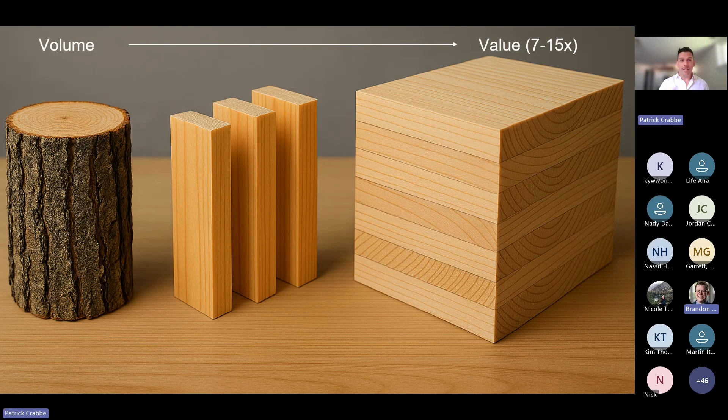So if we take this dimension lumber and we arrange it in a different way to create a mass timber product, which is demonstrated here by a cross-laminated timber panel, which is a long spanning solution for exterior walls, mainly floor and ceiling or interior wall systems. And essentially that's all it is, just dimension lumber, cross-oriented and pressed together to create very high-performing, lightweight solutions.

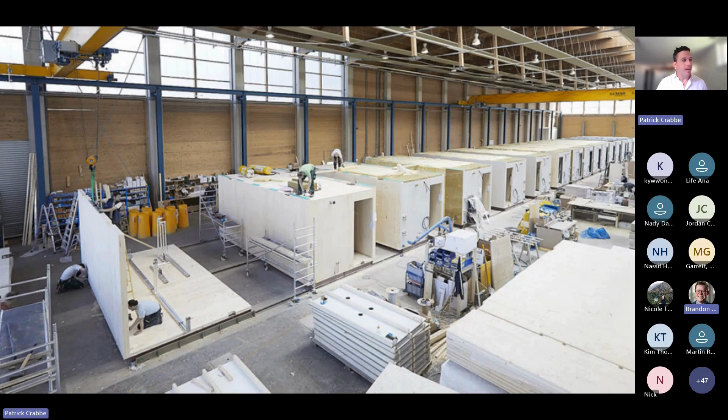And these are prefabricated solutions that can also be modular, as shown in this image. So it really does supply the trend for faster, more accurate construction that really does counteract a lot of the trade constraints that exist in today's market.

Now, the other piece of the mass timber family is glue laminated timber. So I just talked about cross-laminated timber. Now this is glue laminated timber. And what's different about this is more your columns and beams, not your large panels. And again, it's dimension lumber that is just running in one direction that's pressed together.

Yes, it does have to be of higher quality, but again, that just reinforces the value chain of forestry to manage our trees so that you're investing in them so they grow straighter, they are stronger, they have more space to grow, and you're ultimately getting that 7 to 15 times value out of that same piece of wood.

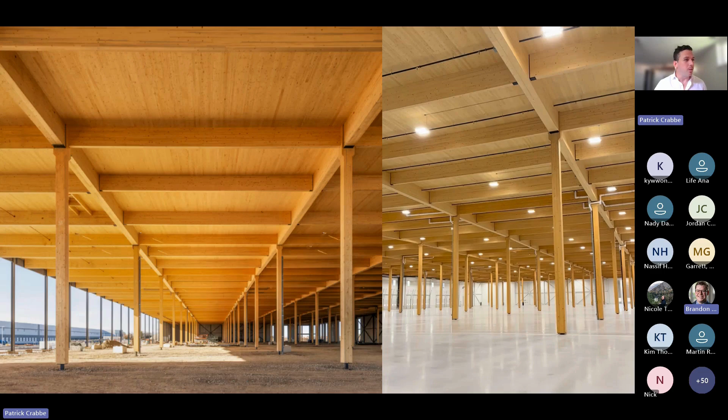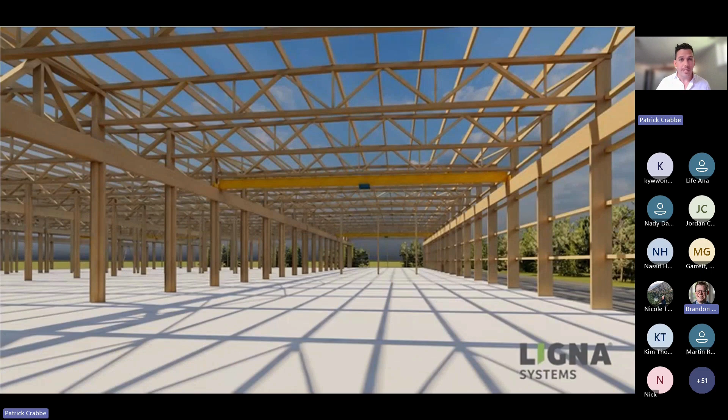And really, these glulam beams are the main structural system for a lot of industrial uses, residential or office. This is the Prologis warehouse in Brampton, Ontario that was just completed, 260,000 square feet. This is our mass timber company facility that Brandon mentioned at the start of the presentation. I'm going to talk about that in a little bit, but we're around a 200,000 square foot warehouse with massive cranes, and we can cost effectively do this in a glulam and CLT structural solution.

And the glue laminated timber doesn't just stop there with kind of your meat and potatoes post and beam construction. This is a Fast + Epp project, the Richmond Olympic Speed Skating Oval. If you've ever been there, it's an amazing building. It has around a 100-meter span with hybrid glulam elements. So really what mass timber provides is a low carbon infrastructure solution that can work in combination with or in direct substitution of steel and concrete or conventional materials.

And the reason for that is because in the East, we've always thought that our lumber doesn't have the right strength characteristics. And that's what I've heard through my entire professional career that has been developing the mass timber market in Canada from day one, all the way to trying to realize manufacturing opportunities here in Nova Scotia.

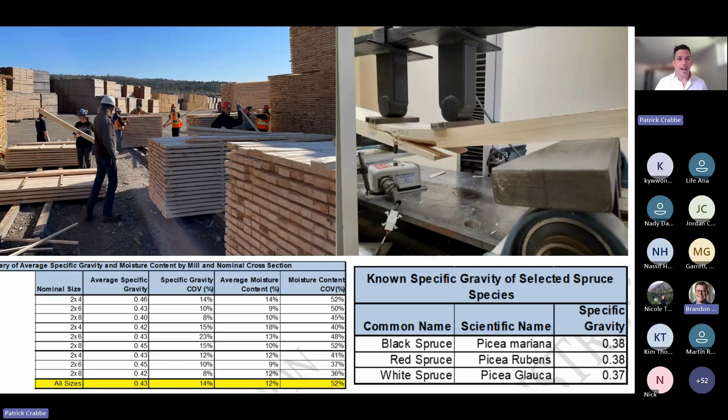So I just said, enough is enough. I think that we need to really test our lumber to see if the published strength values actually are correct and whether mass timber manufacturing is really not that feasible in Atlantic Canada or Eastern Canada compared to the West Coast. So that's exactly what we did. And this really was the genesis of the Mass Timber Company.

And to clarify, yes, I am the director of mass timber at Bird Construction. And in order for us to competitively supply mass timber and grow the market, we need to have more supply options. We need to increase our capacity.

So Bird is not part of the Mass Timber Company, but Bird has been very supportive in realizing the need to grow the mass timber market. So from the side of my desk, leveraging many government partners and two sawmill investors, Elmsdale Lumber and Ledwidge Lumber, we handled over 1.2 million pieces of Nova Scotia spruce and destructively tested almost every piece to truly understand the density or specific gravity value, which translates into strength of fiber.

And as you can see, the published values on average were around 0.38. But in reality, they're around 0.43 or higher. This is just an average with lower quality mixed with higher quality. So what that shows is that we're around a 20 to 25% discount of the published strength rates versus the actual strength of the fiber. So that was an incredible finding, and it really does unlock the opportunity for regional mass timber manufacturing across Canada.

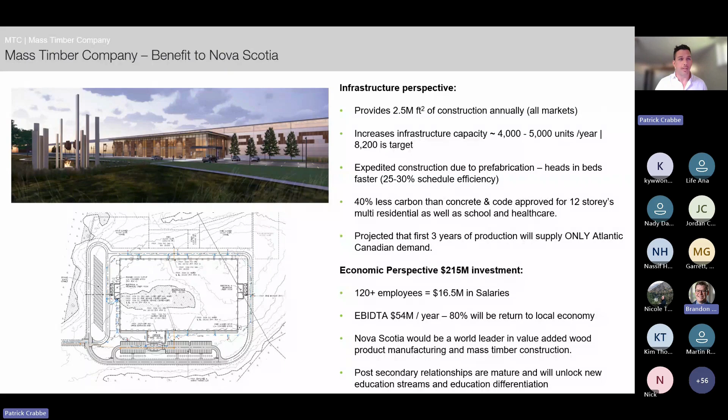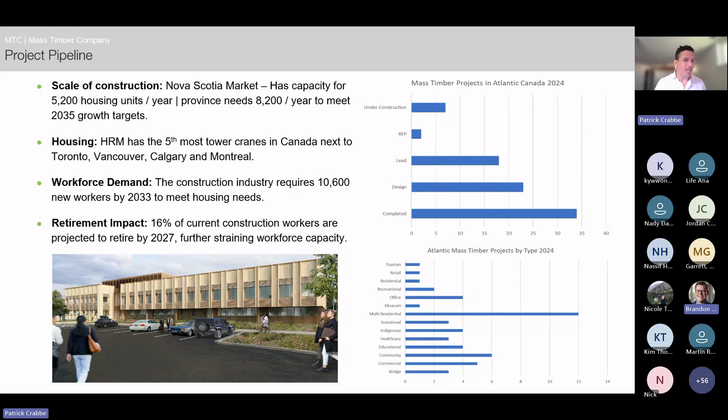From an economic perspective, it's around 120 to 150 employees, very high paying jobs. And it really does create and strengthen the ecosystem here from a forestry perspective, where we will position Nova Scotia to be one of the forestry leaders in Canada. So again, as a regional solution, as we're talking about trade wars happening now, being reliant on export markets to feed our forest industry, and having challenges importing necessary building products from the US, this truly is a market-ready solution that has massive demand and will meet where we're going in this region with a shrinking trade pool of workers.

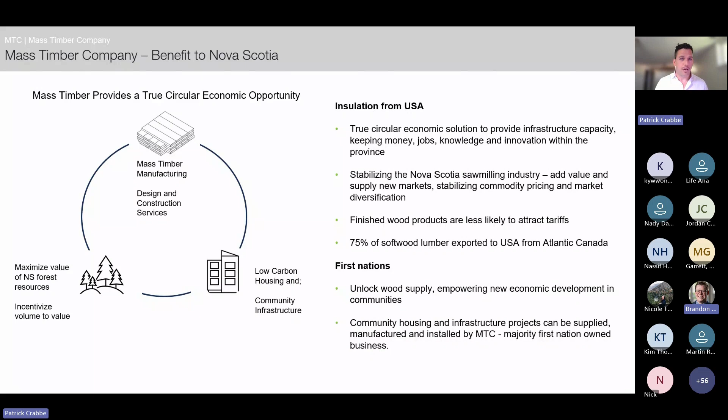So what mass timber provides, from an insulation perspective from the USA, is a true circular economic solution. We grow the trees all the way through, converting them to a building product and using it in public and private infrastructure, from houses to hospitals. It stabilizes the forest industry, it's going to help unlock a lot of wood supply, and it incorporates the opportunity for First Nations to be involved. As it stands now, we are positioning the Mass Timber Company to be majority owned by a coalition of Mi'kmaq First Nations in Nova Scotia, which is really groundbreaking unto itself.

What a lot of cities and municipalities are also looking at is, if there is regional mass timber manufacturing, how are we going to help support this use? And how do we address getting heads and beds faster? We all know through prefabricated or modular solutions, that is the key benefit. You can build faster to satisfy the housing demands. So here in the Halifax Regional Municipality, mirroring what's been done in Toronto and Vancouver, we're evaluating bonus densities for mass timber solutions. Step backs may be relaxed and heights may increase for what will be permitted in downtown cores.

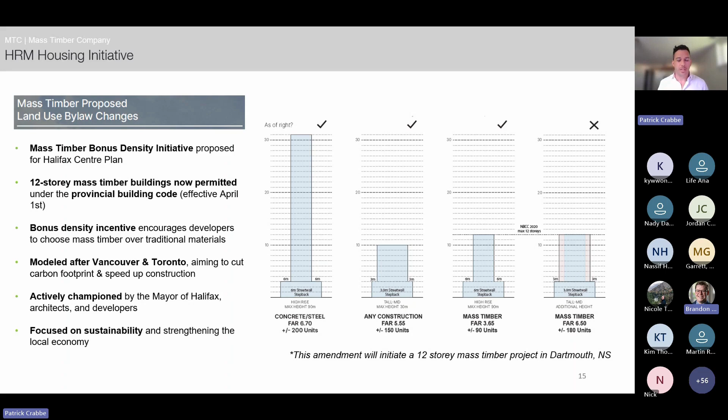So we are talking about 12 stories of mass timber being permitted within the Halifax Centre Plan when it only has to abide by a mid-rise step back of 3 meters. What that means is you'll get about 20 to 40% more density, and you'll be able to build these housing units much faster. So this would be an incredible breakthrough.

Just a quick business case for tall wood construction. Do I think tall wood is really where the market is for mass timber? No. It really is in the missing middle. Anywhere from above 6 stories to 12 stories, I think, is the sweet spot for mass timber from a residential perspective. But this is a very good case that had some excellent findings that I'd like to share.

So yes, it looks like there is a bit of a premium when you're looking at the cost of formwork versus mass timber, and maybe some of the unique engineering challenges that would need to be required to support a lighter mass timber structure of this scale.

So you're looking at about $1 million premium in materials, but then that is offset through the speed of construction. And as we all know, formwork costs are only going up. Form workers are in very high demand, and they're often dictating the schedule for developers. So this is, I would say, a very conservative solution kind of based on a project of this scale.

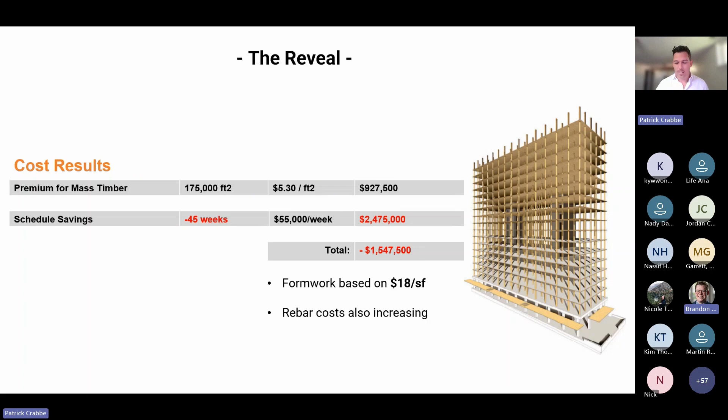Now, to truly realize the schedule efficiencies associated with prefab solutions like mass timber...

Oh, Brandon, is there an issue with people viewing the presentation? No, keep going. I was okay. Just keep going. Yep. Great.

Is that you really do have to have a collaborative contracting model. And this is not really the most exciting thing to be talking about, but it is the most important thing to realize the benefits of offsite solutions. And what I like to say is that the new affordability is truly cost and schedule certainty.

From pre-COVID to post-COVID times, a lot of the contract models that we're using, like hard bid, that worked in the past are really not working today, at the cost of taxpayers and at the cost of commissioning buildings to get people in them sooner.

So in these traditional hard bid models, you really have an owner that's working with a team without a lot of input from the constructability side or market-based trade feedback for costing, or sequencing and logistics associated with supply chain. These are beautifully designed buildings, but when they go out to the market, you're really getting mixed results on what you're going to get back.

And what happens is it creates a very frictional relationship between the designers and the contractors that are bidding these projects, because they're often coming back much higher than what the quantity surveyor had dictated. And then everyone just points to the market and says this is because of market conditions. And there's really no accountability associated with the project.

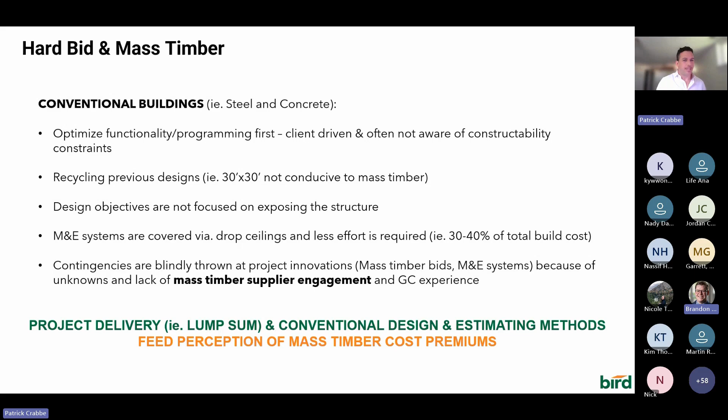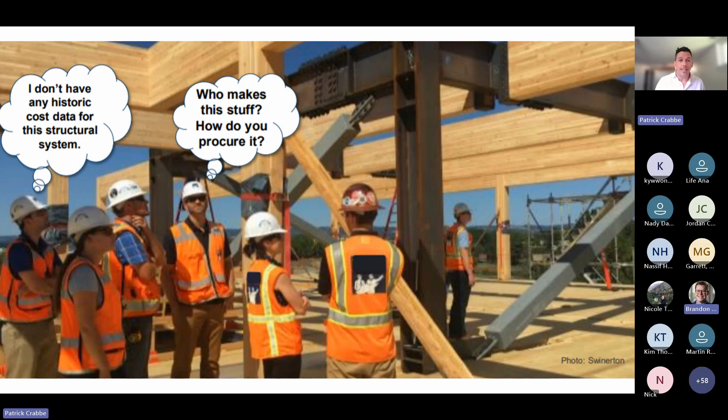So what happens is, if you don't have a lot of experience and you're receiving this package to bid, contractors and the individuals bidding the project are just throwing blind contingencies at it. So ultimately, that's the narrative and why that premium, I would say negative perception, exists.

So why collaborative contracting is so critical is because, yes, these are prefabricated solutions, like I had said, so there's an increased design effort. And often it does require modeling to various levels of detail to do clash detection, to figure out the problems before they happen on site. And so it is pre-construction resource heavy.

And you do sometimes have to engage the authority having jurisdiction just based on false fire perceptions. So there is just a little bit more thought and effort that's required up front. And this is a really interesting graph that shows again why mass timber is somewhat different depending on the region where it's being supplied and constructed.

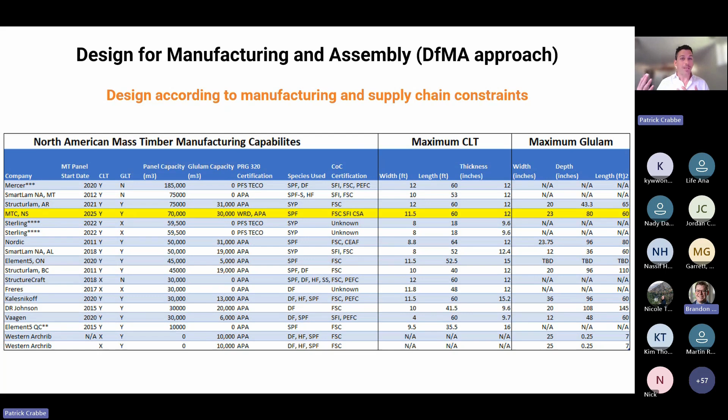And this just goes to show that not all manufacturers are equal. Some have the ability to produce large scale columns and beams, some don't. Some have the ability to produce glue laminated timber, and some can just produce cross laminated timber. So you really have to understand the supply chain for mass timber to really optimize your design, and that requires collaboration.

So this is a great example of a large project. It was a public client, and they had spent a lot of time in the design without having a construction manager on board or necessarily engaging the mass timber industry for feasibility and optimization of design. As you can see, the columns here are very large, and a lot of the columns of this size would have to be manually glued together. So finding solutions to minimize column sizing and beam depth are really critical to the feasibility of mass timber.

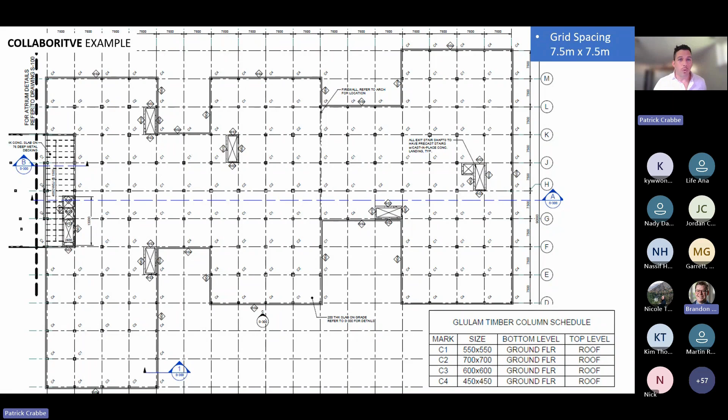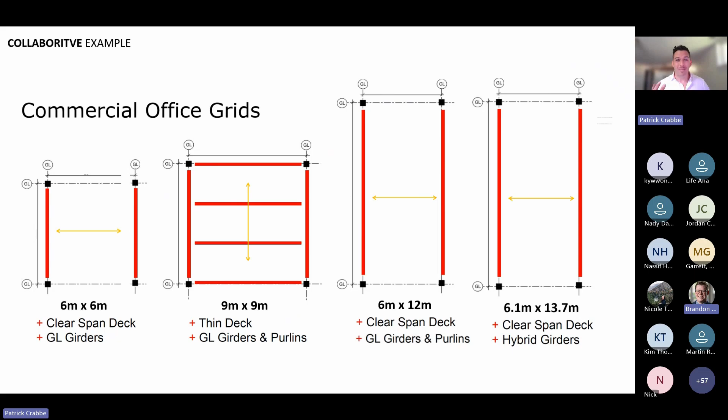So when Bird was awarded this project and we looked at the design that had a lot of money spent on it, it was really just a matter of minutes to realize that, wow, if we change the grid slightly, we can reduce the wood volume in this project probably by 50% and save the client millions of dollars while maintaining the same spaces for programmability. And there are very good grids for office buildings that are slightly different than what would be provided through conventional materials, like I had mentioned, recycling designs that really do provide high performing solutions.

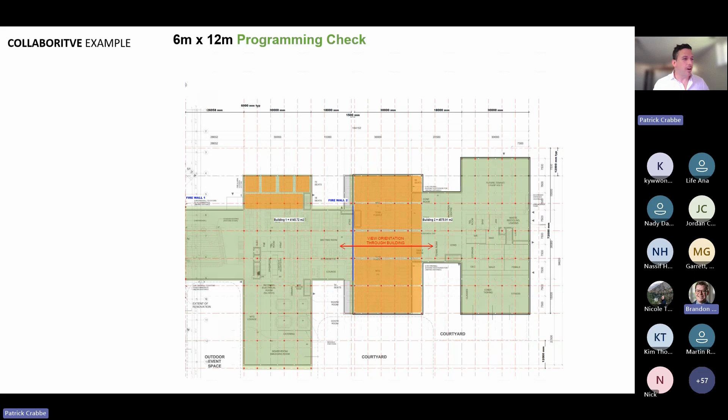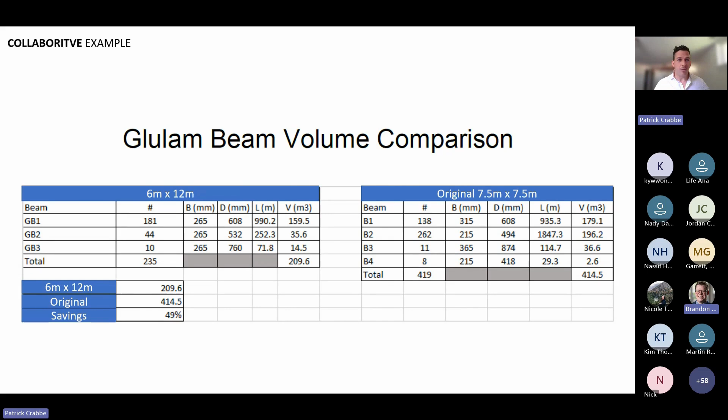If you are planning a mass timber project, engage the mass timber industry. And if you have a construction manager, really lean on them to work out what is the best solution. So I have also developed an early onboard procurement system, whether your project is hard bid or construction management, whether it's getting public money or private money, and it doesn't cost a lot whatsoever to implement. And I have a full presentation on this that I'm happy to share at the end. And really, all the reasons for engaging the mass timber industry early in your design are here. I'm not going to repeat them.

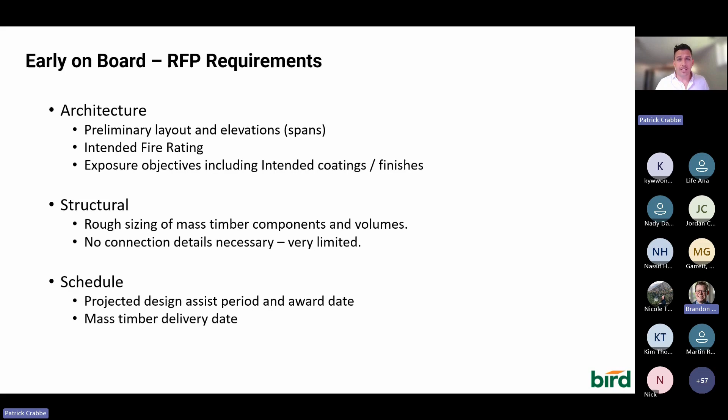All the client has to have is a conceptual drawing, understand a little bit about the layouts. You just need rough member sizing from a structural perspective, no connection detailing, and just what is your schedule expectation. And that can go to the market. And I've developed this evaluation matrix so that you can evaluate all of the feedback from the mass timber suppliers to see which one you want to go with early in a design assist manner.

And let's say the client only has $10,000 to do this early onboarding, then that's all you have. And the mass timber companies will tailor their proposal to provide the necessary feedback to you within that pocket of money. And if you feel that you didn't get the right amount of service based on the design assist, there's an off ramp to then go back out to market. So you're not tied to the individual early in the process. So again, this just brings a competitive element when there's limited information to help you early in your design so you're not wasting time and burning design dollars.

Okay, now this is kind of the conclusion of the presentation. I know I've been all over the map here, but this is kind of the carbon benefit. And this study is very close to being public, and I will make sure that Brandon gets a copy of it and he can share it with all of the meeting participants. As I had mentioned at the start of the presentation, this was in partnership with the Mass Timber Institute at the University of Toronto, Ha/f Climate Design, Kelly Alvarez Doran, Entuitive, Emily King was really the driver behind that, and Bird assisted from kind of the costing and construction narrative.

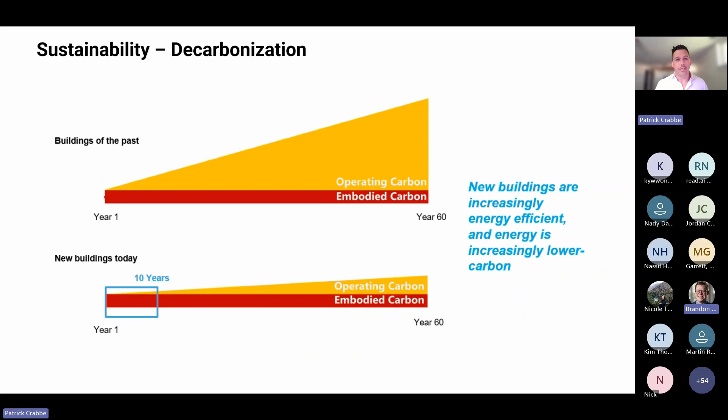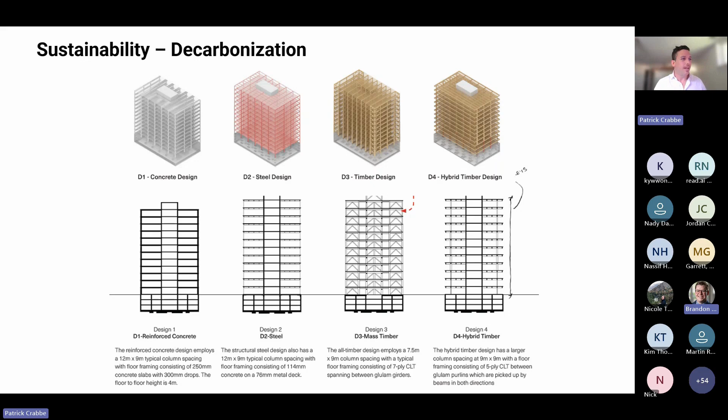So I hope that definition of embodied carbon was clear. But again, this was the summary of this study. We had a concrete design, a steel design, a timber design, and then a hybrid timber design. These were 12-story buildings positioned in Calgary, Vancouver, and Toronto. And as you can see here, the cost dollars to implement a timber solution are very, very comparable to that of concrete. So it's quite exciting.

And this graph down here really does show that global warming potential. Whereas if you're building a 12-story office building in Toronto, you're around 5,500 tons of CO2 equivalent, and you're around 2,500 of that for mass timber. So it's pretty much a 50% carbon savings. So for every 2 buildings you build, you get 1 building free from a carbon perspective, which really does help jurisdictions and provinces tangibly meet their carbon mitigation objectives through public infrastructure.

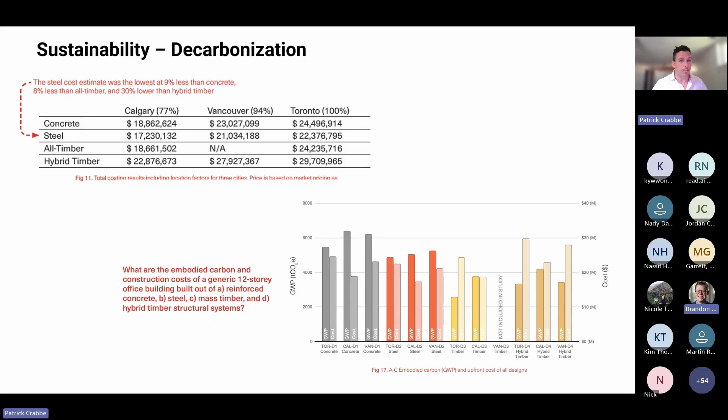Now, what is also very interesting is that wood is a carbon storage mechanism, and this is currently not realized in any life cycle assessments or any building codes or regulations. But half of wood's mass is carbon. We all know from high school biology the photosynthetic process of taking water and CO2 and elements from the soil and sunlight. You're creating complex carbon chains in the form of sugars that are stored in the tree as food, and that is the root of the carbon sequestration.

So when you're factoring that in as a carbon bank, when you're specifying mass timber, not only is it a lower embodied carbon to produce the product and put it into your building, but it's actually acting as a carbon bank throughout the life cycle of that building. So it's almost like an RRSP fund for your carbon mitigation objectives.

And really what that means when you realize the biogenic carbon store is that these can be carbon negative buildings, which is incredible because one of the greatest conundrums of today is having economic growth and population growth and needing infrastructure. It's all coming at the detriment to our environment. And this does provide a strong regional and circular economic solution that's very high performing. So it's exciting. It's very exciting.

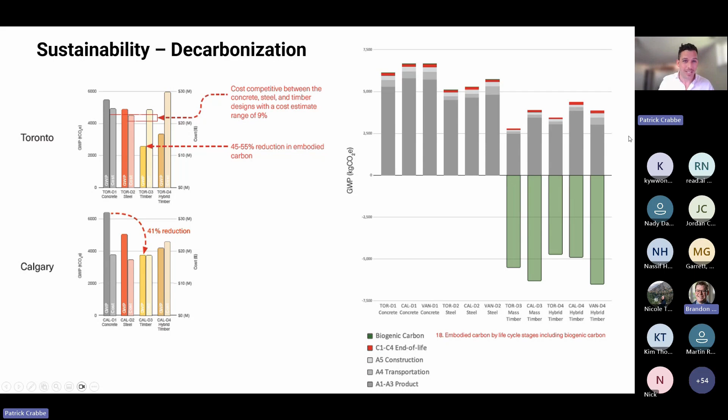So I have to talk a bit about Bird here, and we are one of the only general contractors in North America that has a dedicated center of excellence to mass timber. We have 15 projects under construction across the country now, of all various uses. And within our center of excellence, we collect all of the data to make sure that we've got continuous improvement and education for all our operational and estimating teams. So we're very passionate about this and really want our clients to have a strong solution relative to mass timber.

And these are just the main bullet points of what we focus on. And I would encourage all designers or contractors to implement this same roadmap for mass timber success. So understanding your procurement and your design constraints, as we talked about, knowing your supply chain, meeting with the mass timber manufacturers to understand their capabilities, what member sizes they like to produce and can produce efficiently to make your buildings cost efficient. You really have to understand insurance, and we have all of those solutions. In fact, now we're able to underwrite projects of very large sizes for almost no premium compared to conventional construction.

And there are a lot of QA/QC considerations with mass timber, much like any product that you're building with, and moisture management is one of those things. It's very simple, if you ask me. There are simple measures to put in place from design strategies to construction implementation. I'm happy to work with all of you on that, and that also reduces the insurance rate. But these are just the key components. This is the key recipe to elevating your firm and your company to be proficient at mass timber.

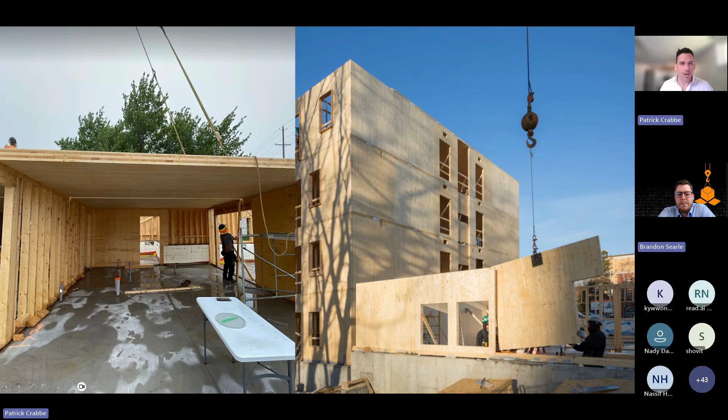I'm just going to share an example. This is in Dartmouth, Nova Scotia, this project to the left, and it is a light wood frame, 3-story affordable housing building that has just a 5-ply CLT floor plate that's exposed. We had prefabricated exterior walls and interior walls, and then the cross-laminated timber was just dropped in place. And this creates about a 10-inch solution for your floor system,

because you have a concrete topper on top of the 5-ply CLT. This would be comparable to a 14-inch I-joist, which would require more buildup to your finished floor system. So it actually presented a more economic solution compared to engineered wood I-joists, because it was a thinner solution, which translates into less building envelope. It was a really good example and response to the question you just asked.

Thanks. And I figured you were gonna share a case study. Yeah, there will be a case study available for that, and Rooted, I believe, is the name of the group now. They were the Dartmouth Affordable Housing Association.

And one thing to your point, Brandon, that I meant to say, is that I've never worked with anyone that has built a mass timber building that said, I will not do this again. So when we're talking about groups around procurement being a little too scared to take risks, out of the hundreds of projects I've been involved in, not one person has said, I will not do that again. So in this case, this group is looking at mass timber for the majority of their projects moving forward.